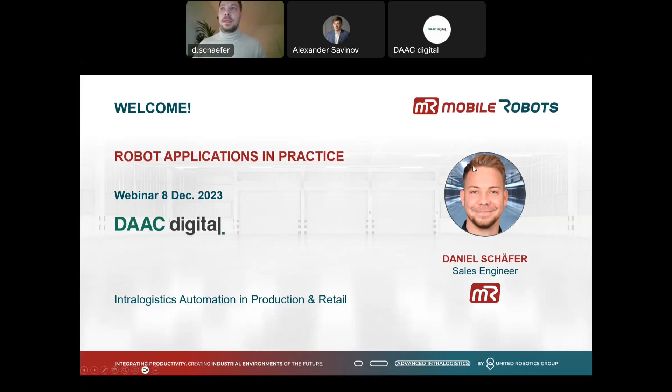So the opening is already done. Thank you, Alexander, for this. In the second part, I will show you some of our automation solutions from our company, Mobile Robots. This will last about, not 30 minutes, I think about 45 minutes.

And after that, we will see some performance cases and practical applications that we have already done. I think that should be the most interesting part for you, because there you can see how we really work and how we can make your business efficient with our robot solutions.

After that, we have enough time for a Q&A session. So every question that you have in mind, please write it down and we can discuss about it later in detail. Also, you will get the presentation afterwards from Alexander, and you will have all the presentation and also my contact details.

So the first question is, what is Mobile Robots? Mobile Robots is part of the United Robotics Group, which is a company of companies for robotics and also for automation. In our company, we have very different entities that have responsibility for different robot applications.

We have some companies that have the focus on humanoid robotics. We have some companies that have their focus on service robotics or industrial robotics in general. And we, from Mobile Robots, are part of it, and we have our focus on collaborative robotics and autonomous intralogistics with mobile robots. Over these company groups, there is the RAG Foundation.

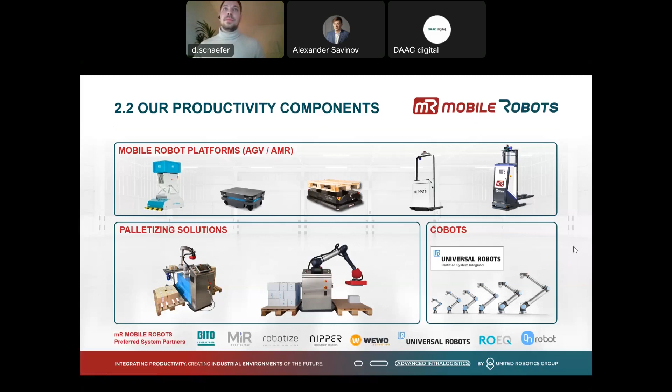So we are a total solution provider. What does this mean? Or why should you use an integrator instead of a manufacturer? When you are searching on the internet for robotics, or collaborative robotics, or autonomous intralogistics, you will find all these manufacturers, or even more.

So, for example, if you have a use case and you are looking for a solution and you contact the manufacturer, the problem is every manufacturer will tell you, okay, I have the best product in the world. But it isn't that easy. There are some really good products, but not every product is usable for every use case. And that is where we come into the game. We are an integrator and total solution provider.

So the first step is that we do a consulting. We look at the use case and see what is the status quo and what do we need to make a total solution and automate the intralogistics so that it works really well for the customer. The good thing is that we are independent from the manufacturers. That means for us, it doesn't matter what system we use, it only matters that the use case works for the customer. So in the first step, we do the consulting and show different systems that could work.

Then we build a total solution with a conceptual design and check the feasibility. Once we've developed this with the customer, we do a test installation. That could be one week, but it could also be several months, to see how the solution really works in the customer's environment and how the employees react to it.

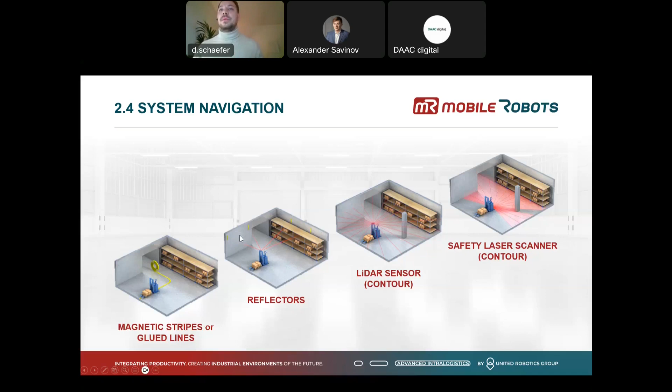As I told you before, there are two big differences in mobile robots. The first are the AGVs - in English called automated guided vehicles. And the other ones are the AMRs, called autonomous mobile robots. I will show you now what the differences are.

So an AGV, as the name suggests, is a guided vehicle. That means it is guided by lines. In the past, these were glued lines or magnetic lines on the floor. Nowadays, these lines are virtual. We have a start and a goal, and we follow this line till we reach our goal.

But what happens when there's an obstacle, for example a pallet or a person? The system detects the obstacle with its sensors and will stop, staying stopped until the obstacle is out of the way.

The advantage is high availability and very predictable, reproducible cycle times, because we know every time how the system will go, and employees also know this is the path for the systems. The disadvantage is that we need free travel paths, so in an environment with many obstacles, this might not be the right solution.

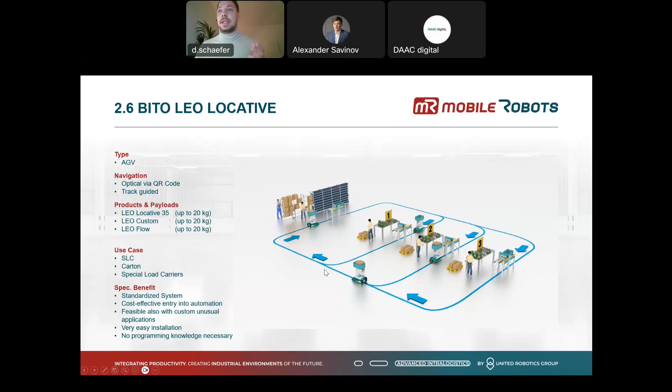The second one is an AMR, an autonomous mobile robot, as I told you before. MIR is the manufacturer's name. Maybe some of you recognize it, because they were the first manufacturer that developed the modern mobile robots as we know them now.

This is a platform AMR. It has a payload up to 250 kilograms, and we have many functions on this because it's a platform, and you can build more or less whatever you want above it. That means this robot is like a chameleon; we can use it for many different use cases. I will show you the video.

I hope you hear. Okay, there's no sound behind it, no problem.

This is one use case, for example: one tool we call a shelf carrier. You can put a shelf on it and transport it. It doesn't require very much space.

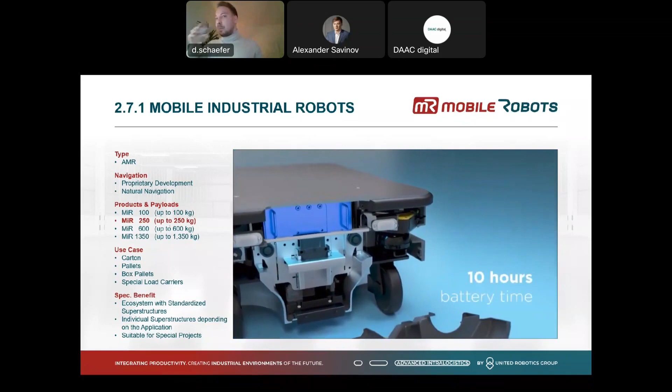We see what the robot looks like from the inside. This is the safety field, here are the laser scanners, and here is a 3D camera for safety as well.

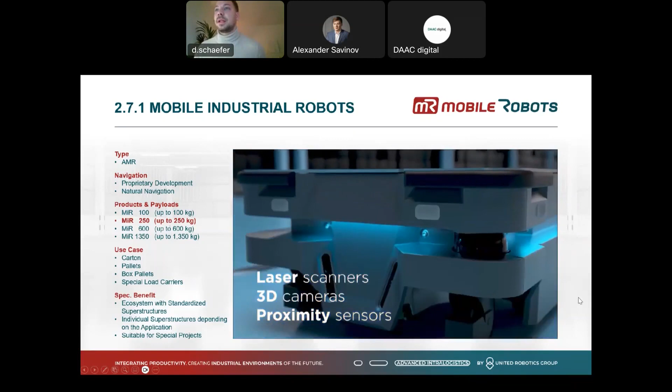They also have light indication when it turns, for example. You can put a cobot on top, or whatever you want on top. This is a really big advantage.

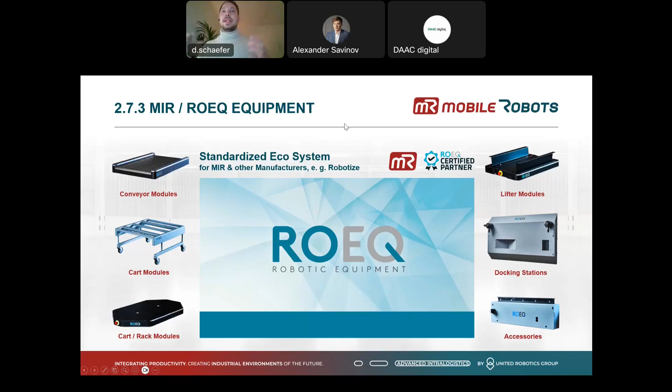For this robot, there is an ecosystem of equipment. We build some equipment ourselves; when we need a special solution, we do it completely on our own. But there is one manufacturer called ROEQ, also from Denmark like MIR, and they have built a standardized ecosystem with many functions.

The most important are the conveyor modules, for example when you want to transport goods from one conveyor to another, or the cart modules, as we've seen before in the video, on which you can build whatever you want—it could be a shelf or any other structure. There are also some lifting modules and other accessories.

And I will show you some of it now.

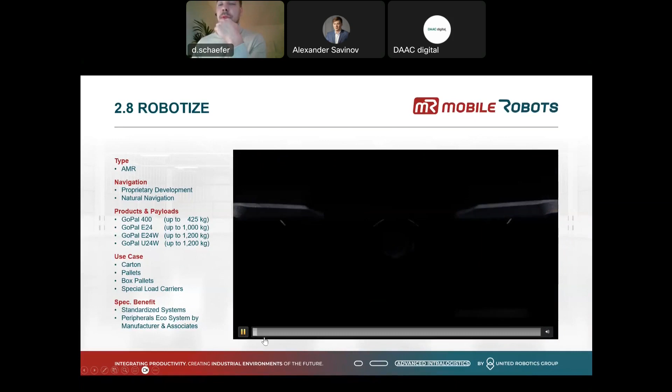What is also very cool on this robot: on the one hand we have the safety laser scanners for human safety, but on the other hand, what you see here is a safety bumper for the foot. So we have two different safety features, which is very good for the safety field. Every robot, when it drives, has a virtual safety field around it, and because we have this safety function, it could be very small. This is very good when we don't have much space, because it reduces the footprint in the sensor field of the system.

You can see here, it's very flexible. It can turn about its own axis.

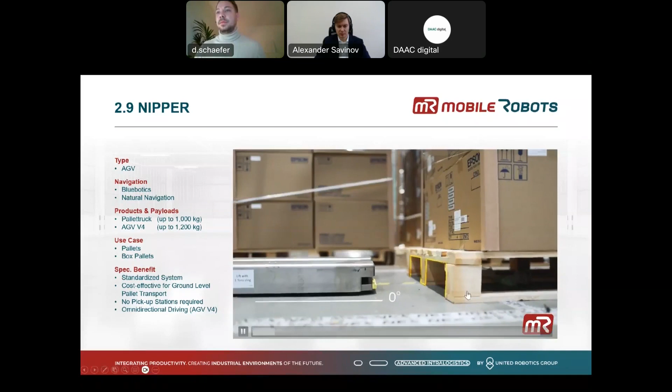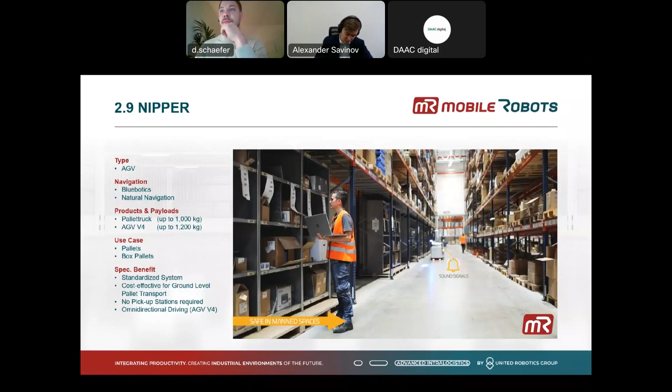We have here forklift scanners and even barcode scanners here. As you can see, we don't need much space around the vehicle. The old one has a speed of 1 meter per second, but the new one can also drive 1.5 meters per second. Here are the safety laser scanners between the forks, and we have a blue spot as well.

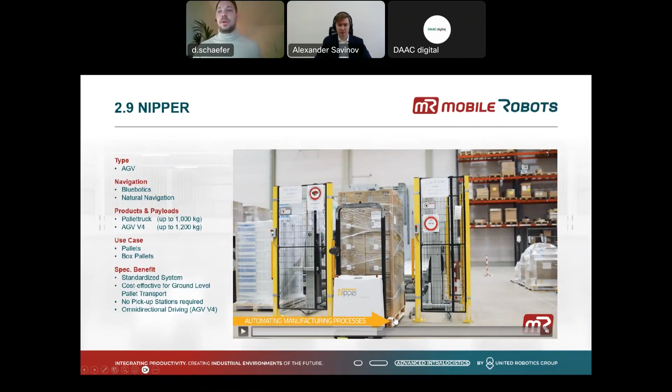On this system, we have only a small lift, about 150 millimeters. That means it's only for floor-to-floor transport, or for example you can transport it to a conveyor that is near the ground.

Yeah, pleasure. So this was on this year's Logimat. Here you see myself with the sales manager of Nipper, Willem Lepelas, and behind him you see the new Nipper version 4. It has a very cool new design and also now a LiDAR sensor on top for very stable navigation, as I told you, because you can see on the bottom floor and at this height as well. But you will see later on this video the driving functionalities, which are pretty cool and a very big advantage.

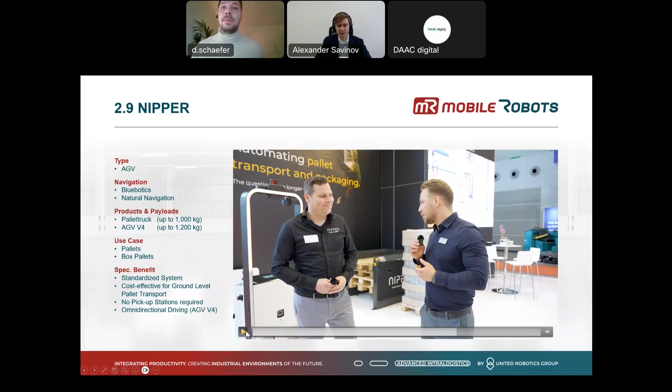To see the new Nipper running on your booth, what was the motivation behind this new development?

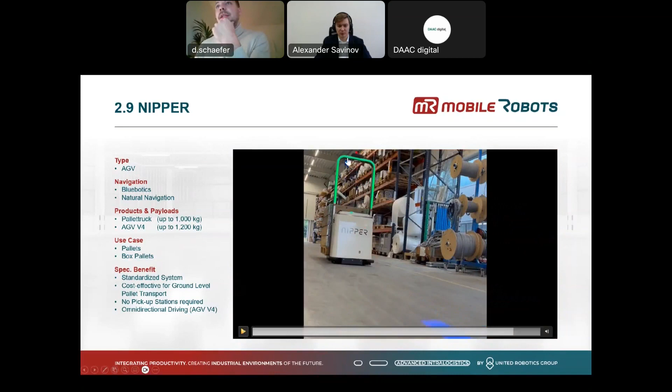Well, thanks for having me. The motivation is to have the perfect connection in a production environment. So what we redeveloped is an AGV that can fit into any existing production process. It has omnidirectional driving, wireless charging, and the lowest forks on the market. You also see here LED lights that can react to the environment. That means it is an AGV, so it will stop when an obstacle is in the way, and with these lights it signals to the workers or employees what status it is in.

When it is green, it means the way is clear and I can drive. For example, when a person walks here, this light follows the person and detects them. It would turn red and stop, telling the person they are too near and the system can't drive anymore. When the person goes away, the light changes and it can drive again. This is very good for acceptance among employees because they know what the system wants, more or less, with any type of pallet.

So maybe you ask yourself, what if I have pallets but don't want them transported only from ground to ground, and instead need to pick them up from a shelf? For this use case, we have the WEWO AGV pallet mover.

It is one of our favorite systems as well. As you can see here, we have safety laser scanners between the forks, and on top we have a LiDAR sensor, plus a light and blue spot. So we have a really good safety field and really stable navigation.

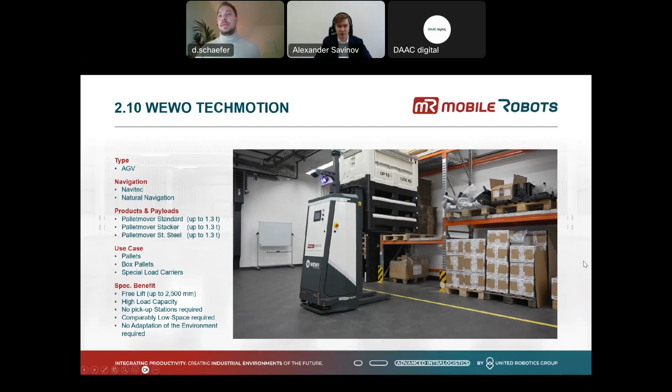But it requires a little bit more space because it is bigger, for example like the Nipper. Here you see the first shots of our customer Mon Media, where we implemented 12 of these systems.

So the lift is also able to bring goods to a conveyor that is at a very good height, as you can see here.

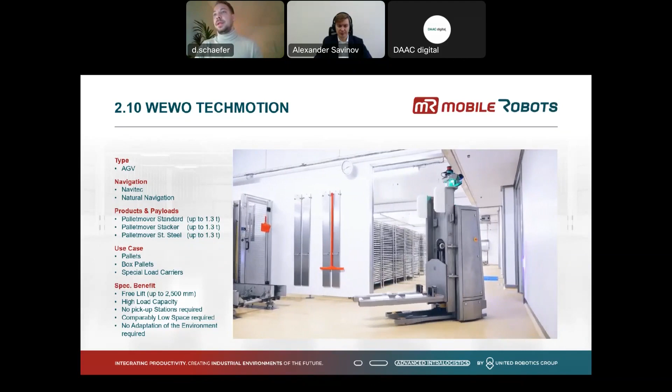So here's the stainless steel version for the food industry or pharma industry. And we can do a special design if it's needed for the customer.

As we are not only a system provider, we are an integrator. That means we are always looking for good solutions for the customer, especially for software, because every system has its own software. We wanted to create a human robot interface, so we developed our own software for a big customer, and we now use it on other projects as well. We call it Mission Control.

With this software, you have full insight into every mission, and we have a dashboard. You can use it with different users, and you can use this software not only for one system but for several other systems. That means when you have different systems in your company and environment, you can control everything with this software.

It's very easy to use for the worker and the employees, and you can create new missions within seconds. You can chat between persons and devices. You see the loading capacity of the system here as well every time, and you can track where the system is.

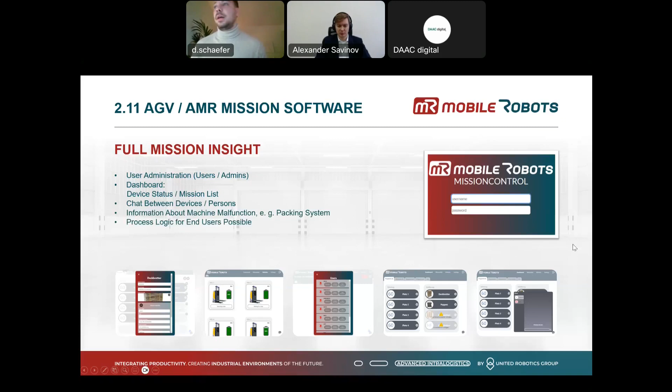This is something we are working really hard on. Okay, this was more or less most of our mobile robots. As I told you, that is our standard portfolio, but we have several other projects where we use other robots as well. As we told you, we are independent from the manufacturers, meaning if we have a use case that requires other robots, we will use other robots to make a perfect solution for the customer.

Now we come to our second big business case, and that is cobot palletizing. Palletizing was one of the first use cases that we had with collaborative robotics, and over the years we developed a very good standard solution for different palletizing needs.

We have different sizes. This is the medium one with a UR10E from Universal Robots. It can have a payload of up to 12.5 kilograms, and we can palletize Euro pallets with it. Then we have the model Palletizing L with either a Doosan cobot or the Universal Robots UR20, with a payload of up to 20 kilograms.

We are also able to palletize bigger pallets like industrial pallets as well. And now there's the newest development from Universal Robots, the UR30, and now we are able to palletize payloads of up to 30 kilograms.

And what makes this solution so special? I think most of you know normal industrial robotics, for example from the automotive industry, which are always really big and need really closed safety fields, with big fences or sensors around them to make it safe. This solution is not only flexible because you can change the location within minutes, and it's mobile, but it is also safe in itself.

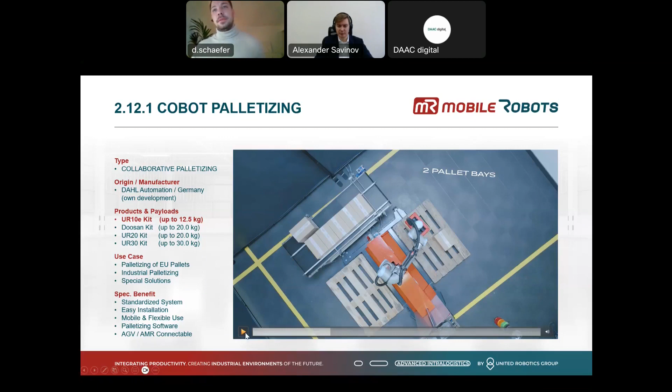We have the system there as well, so we can palletize to a height of 2.2 meters or even more.

We cannot really hear you when it's on top of the video. Please, we cannot really hear you when you speak on top of the video. Okay, okay, thanks for the information.

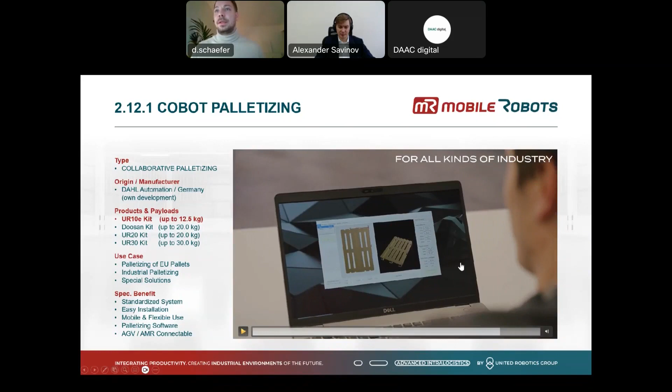Here we'll see the own palletizing software that we developed. It comes with every palletizer, but we will go into detail about this later on.

So this was the medium kit, and now we have also a video for the bigger cobot, the 20 kilogram one. Here we have a Doosan cobot on top, but we usually use Universal Robots. This is a special conveyor that we built. It's very special because it has rolls on the surface. For this solution, we need to grip two packages at once, and we have special grippers already built that can pick up six or eight boxes.

When the products come from the conveyor, we need to stop them here. For example, if you don't have a carton but a surface that could be a foil, and we stop it while the conveyor keeps turning, you could damage the surface. For this reason, we have little rolls here, so there is no pressure at all on the product, and we can stop it without causing any damage.

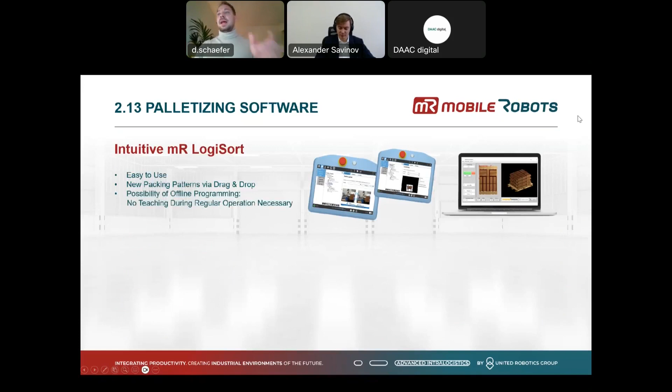Now we come to the palletizing software that we developed. We call it LogiSort, and it's really easy to use. It always comes with our system, and you can create new patterns within minutes. For example, we have customers who have several hundred different patterns, or they can have new patterns within days. With the software, it's really easy with drag and drop, so they can create these patterns within minutes.

First, you create the boxes and their dimensions, then you set the orientation, and then you have a new pattern. You can use this data with a USB stick, put it on the palletizer, and then use this pattern very fast. This is our own development.

Okay, this was more or less the presentation of our portfolio, and now we will move on to our performance cases.

Two of them are filmed by ourselves. The biggest one, or the most important one, is the proof of performance on Claas Industrietechnik. It's a very big customer of ours, and in this use case you will see how we really start every project and what is possible with the time. It is about 13 minutes.

When this video starts, I will stop speaking and let you enjoy it. After that, we will see a use case from the printing industry, the Bertelsmann Verlag, with our WEWO systems that I showed you before. This is only a teaser because the marketing is still in the works; the video will be finished early in 2024. My colleague Manuel is working really hard on it. And then we have also some performance cases from our partner MIR, because they have very good marketing. This is from automotive, mechanical engineering and retail goods, from Eaton and from Forvia, and they are in the Czech Republic and in Romania.

So I hope this works now, one second. Okay, you see the video? Yes. So now I will stop talking, I hope you hear everything. Please enjoy the video. We can hear your comments as well, it's now the perfect volume. Is it too loud? If you have some insights about this, you can add them on top. Okay.

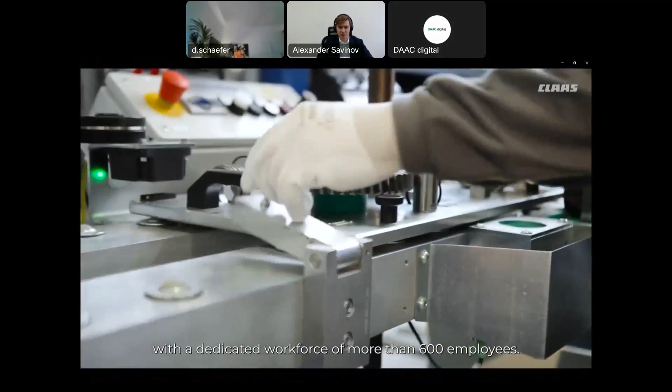Claas Industrietechnik in Paderborn, Germany is a center of technical innovation. An impressive history unfolds in the factory halls, inextricably linked with the renowned parent company, the agricultural machinery manufacturer of the same name. Since 1957, Claas Industrietechnik has been driving development in drive technology and hydraulics, with a dedicated workforce of more than 600 employees, for Claas machines as well as external customers.

A particularly innovative product line are the continuously variable transmission variants for Claas tractors. The components required for this are processed with maximum precision in 16 fully automated processing stations. Employees, trained to automotive industry standards, assemble around 700 components into one drive unit. To provide them with the best possible support, the company has always relied on appropriate technological solutions in production.

With the goal of increasing the efficiency of internal transports, more than 90 kilometers per day, Claas Industrietechnik has been trusting the AMR and AGV integrator DAAC digital and the autonomous transport system GoPal from the Danish manufacturer Robotize since 2020. We started in 2020 with Claas and first made a test position there: one robot, one charging station, four pallet stations. With these components, we first mapped a basic process to find out whether the unit can work in this environment.

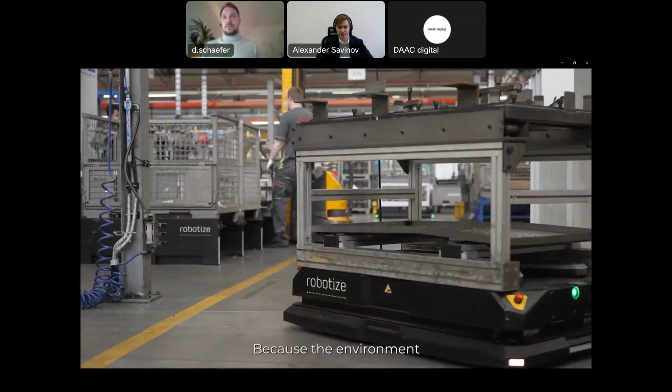Because the environment was quite demanding, attributable to oil from the processing machines and metal chips lying on the path, we had difficult ground requirements in the sense of very uneven ground. This resulted in many blows that the device had to cope with. We were faced with narrow driveways and a lot of passenger and device traffic.

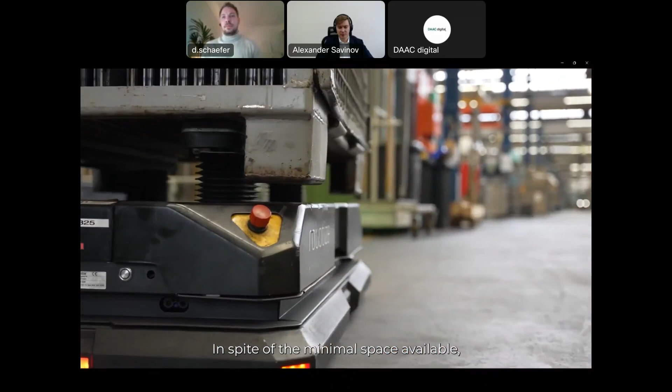After 2 months of testing, we were able to determine that the robotized system can cope with these difficult requirements. In spite of the minimal space available, the robot works at its lowest limit.

We have really created a lot of storage space here and a very fluid workflow for the employees. The robot we tested with was then replaced by the final model that Claas intended to use, a robotized GoPal E24. This type is able to handle payloads of up to 1 ton. With this first step, the initial process was finally implemented.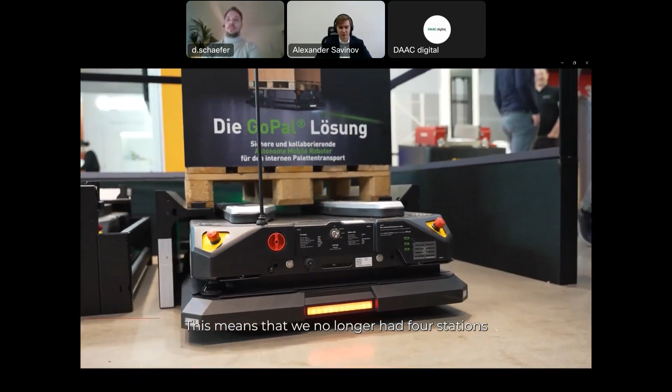This means that we no longer had 4 stations with which we only tested, but we actually equipped several processing centers and set up several stations in front of the washing plant in order to carry out this process of delivery and return of the goods carriers to be completely automated.

As of today, processes have been introduced to transport goods away, which previously had stood in the production area waiting for the next machining step. These parts are now transported to the high bay warehouse by the robots and recollected from there when needed again.

This makes the manufacturing area much tidier. You have more space and you can work more cleanly. For Claas, advantages of the robotized system are actually many-fold, depending on the process we focus on.

It has been shown that the system is very well suited to automating a process that previously had been very strenuous for workers. As a result, heavy parts are no longer carried manually from the machining centers to the washing plant, and the goods carriers back again. We completely automated this by the robotized system, resulting in corresponding capacities being freed up among the staff.

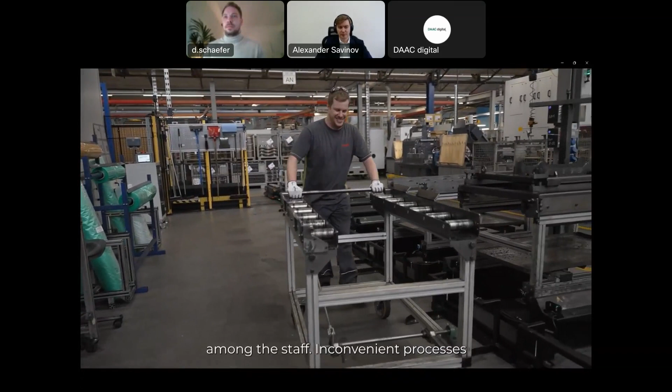Inconvenient processes, where men only walked through the production, have been eliminated and could be completely taken over by the robotized units. Regarding the selection of the autonomous system, the choice has fallen on Robotize, since it is very flexible.

In this environment, an AGV, for example, would not have been successful, since Claas is a company that has grown, a production environment that has grown. This means you have no wide corridors that are always free, that always look the same. This is why a flexible system is needed that can avoid obstacles and drive around them, a system which can also choose alternative routes when a track is completely blocked.

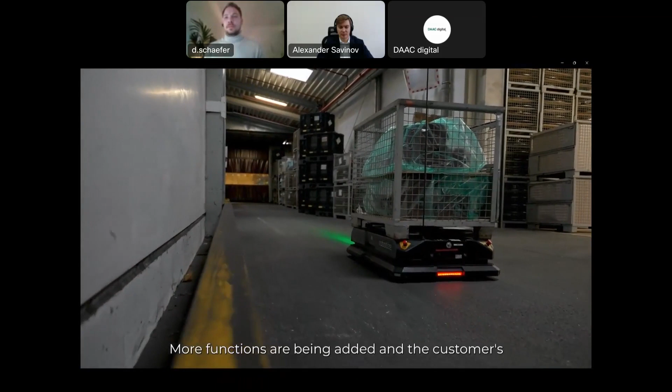Another advantage of the robotized system is the software updates. In this case, we have a very flexible manufacturer who accepts our suggestions for improvement and who delivers software updates which are at our free disposal. More functions are being added, and the customer's requirements were and still are specifically addressed.

Different features were introduced especially for this customer, but they also bring added value across the entire fleet. This means such developments are not only customer-specific, but also bring added value again for each user of the system. As we told, Claas has started with one device, and then we went one step at a time here together with the customer.

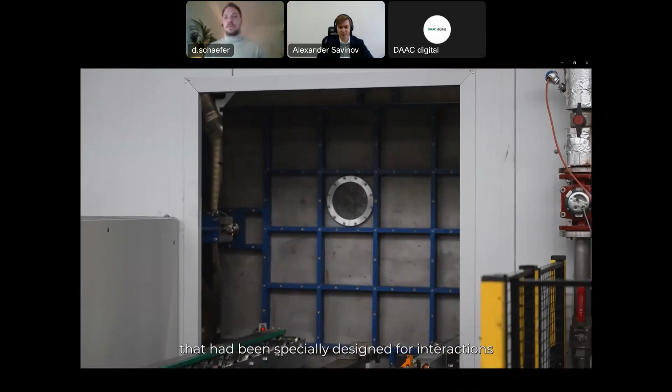In this process, the system was not only expanded with robotized components, but additional modules were also combined with it. This means not only were more and more machining centers integrated, but a washing system was also installed that had been specially designed for interactions with the robotized system.

As a result, the robots can now enter this washing plant automatically. The parts are removed from the carrier and fed automatically into this plant. The robot takes the goods carrier out again and puts it down so that after the cycle, a worker can put up the empty carriers.

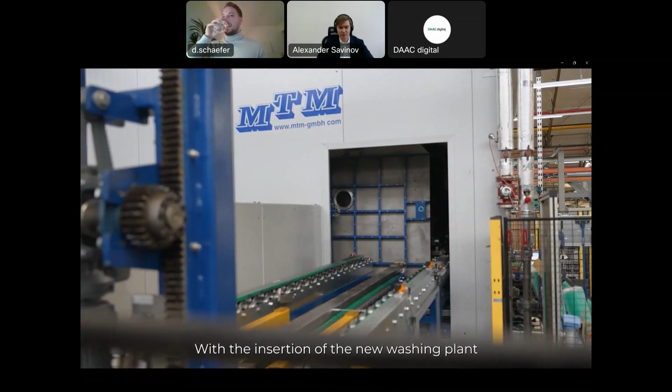And then these goods carriers are returned to the machining center. With the insertion of the new washing plant, a completely new warehouse concept was also directly integrated. We are talking about this large area of stations you see here.

The process is that the washed parts are taken out of the plant with a crane and, as it is shown here, are put into the mesh boxes. Once the boxes are full, they are moved to the warehouse.

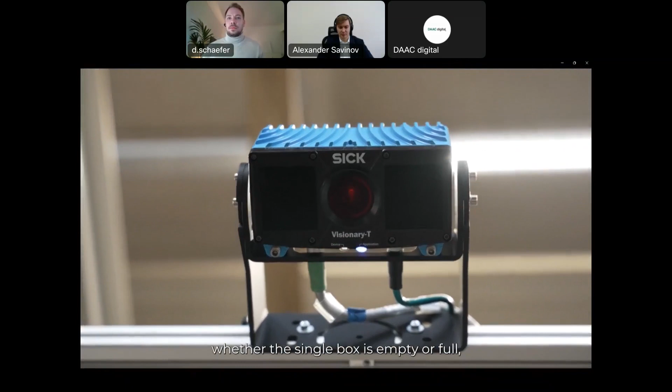These mesh boxes, that's the key here. They always have to be positioned the right way around. Therefore, they are analyzed by a camera to verify whether the single box is empty or full, and if its alignment is correct. Depending on its status, the mesh boxes are then correctly sorted by the robotized system and reintroduced into the process cycle again.

We have seen that the employees were always positive about the replacement of the manual processes. It's nice to see all the interactions, not just between employees and AMRs, which is kept very simple indeed. We use manual call buttons. The operator just pushes the button, and then everything is done for him.

At the same time, he also has a status display. This is partly solved by digital means, by the use of tablets or screens, as we can shift this status functionality with more complexity to the devices mentioned.

In addition, we ensure the interaction of the AMR system with everything that is important in the manufacturing environment. The simplest example is the roller doors. The AMRs pass through a large number of roller shutters at Claas, some sensor controlled, some actively opened by the unit. Here we benefit from having simple I/O boxes on board - very simple small boxes which are fully integrated into the system. You can directly connect the roller gates, configure them, and they are included in the system.

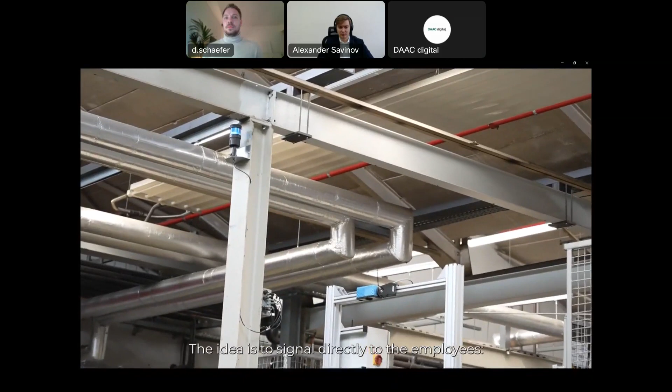For example, in the storage area, we control LEDs via these I/O boxes. The idea is to signal directly to the employees that there are pallets here that now have to be picked up and taken to the high bay warehouse. This means visual indications to trigger interactions with staff can be easily implemented.

A very important aspect is also the topic of security, especially on the main corridor, where our robots are traveling up to 2 meters per second. Through a system that integrates not only our AMRs, but also the traveling forklifts, we project visual markings directly onto the intersection ground. No matter if a robot is coming now or a forklift approaches, people are warned visually.

Another autonomous transport that has been implemented with our support is metal swarf removal. In this case, two robotized units are working in combination to remove full chip containers from the machining centers and reposition an empty container.

A special requirement, namely that everything has to fit into the smallest space, which is typical for the brownfield where we can't reschedule, is particularly evident at the parts washing plant. Although this plant was newly installed, it still had to fit into the tightest of spaces.

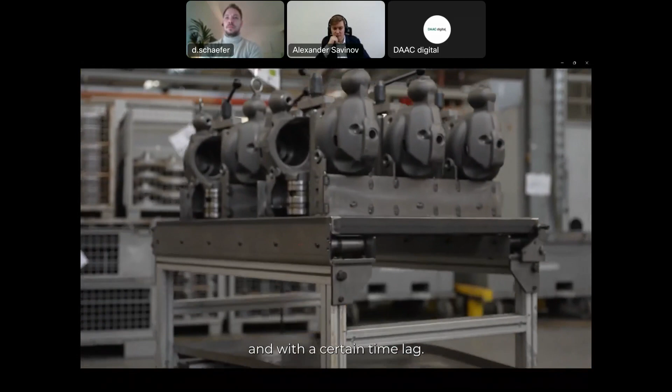About 70% of all transports at Claas Industrietechnik are led to this new washing plant, meaning we have a real challenge here regarding traffic. This is because the transports usually arrive in an orderly manner and with a certain time lag. But especially after the break, 3 or 4 robots regularly gather in front of the washing plant. This had to be solved.

Indeed, we have an AMR system here that finds its own way, but even this feature is ultimately limited. Consequently, as the responsible integrator, we had to work very precisely and take many details into account in order to finally achieve a good workflow here and ensure fine processing of all individual missions. And this is exactly what we have managed to do.

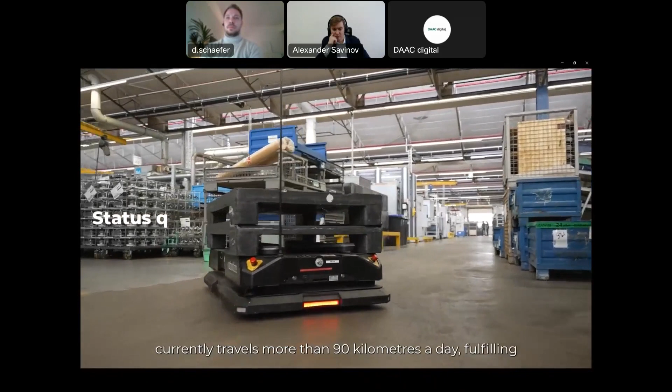As of today, the total system has grown to 6 robots. We have approximately 150 stations, and we are currently working on an expansion, for example with a pallet magazine that is to be integrated. The robot fleet currently travels more than 90 kilometers a day, fulfilling about 500 single missions. That means we are proud of a really productive and effective system here.

So that is an impressive case. Congrats on that, it is an impressive case, yes. Yeah, we are glad to hear this. Yeah, we are really proud of it.

So the second one, this is also a very impressive case, or maybe an even more impressive case, but it is not fully finished. We only have a teaser here, but it will be finished in early 2024. And if some of you are interested, we can give it to you as it is finished. We now see the teaser here.

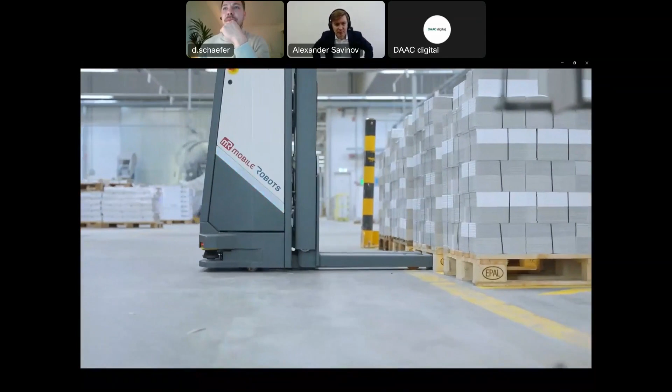What you can see here, this is an AGV. That means, as I explained before, we only follow the line. But that doesn't mean that this should be a problem. When the driveway is clear, we are able to drive the same ways as humans with other forklifts or other systems. So it has a very good machine-human connection, and it is very stable in the navigation, even if there are other vehicles on the roads and other traffic.

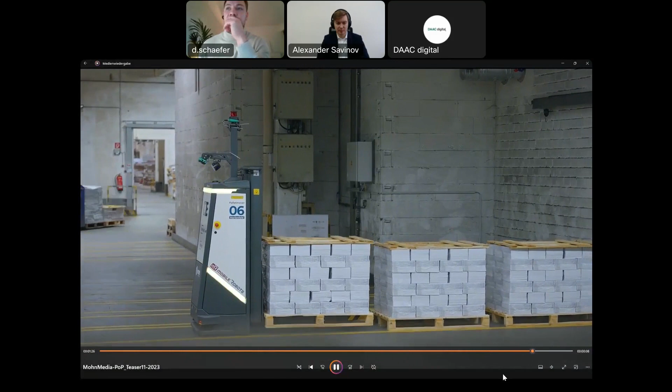I will be happy when this use case is finished and this performance case is finished, and I will show you the full video then. So now we come to the performance cases of our partner MiR.

These are the performance cases of our partner MiR. It is not filmed by ourselves, but we have already done many projects with these robots and many use cases. It should be interesting because it is in Eastern Europe too. This is Forvia, based in Czech Republic, and Eaton, based in Romania as well. Now we see the performance cases of our partner MiR.

Forvia is one of the world's largest automotive technology groups, and 1 in 2 vehicles worldwide is equipped with Forvia products. In our Forvia exhaust system plant in Písek, we produce exhaust systems for our main customers: Daimler, PSA, and Volvo.

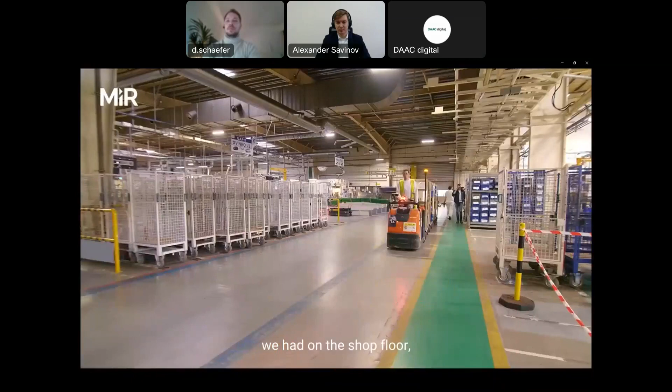I would start from a historical point of view. Something like 5-6 years ago, we had on the shop floor forklifts, stackers, and manual guided equipment with people. Of course, we faced a lot of risk of accidents, and we decided to switch to automation.

We chose MiR robots and installed 14 robots, which secure both safety and efficiency on the shop floor. The mobile robots MiR are also used in other countries - aside from the Czech Republic, we have them in France, Italy, and Portugal. Forvia uses its fleet of MiR robots to automate several processes within production and logistics.

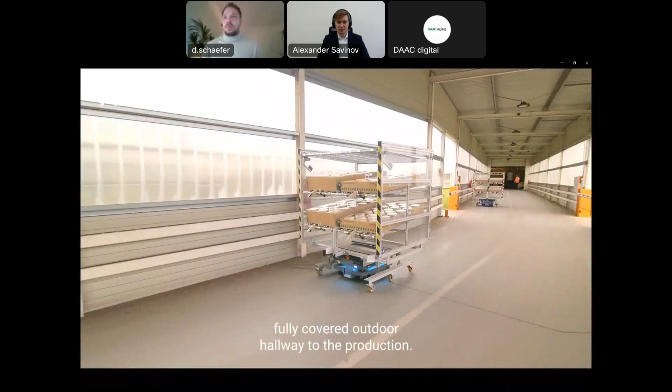The 7 MiR 250 robots are used to automate the transportation of monoliths from the monocage to the assembly of work-in-progress parts. The robots transport the monoliths from one building through a long, fully covered outdoor hallway to the production area. Here, gravity systems deliver the monoliths and pick up empty packaging to take back to the warehouse area.

Forvia uses 7 MiR heavy-duty robots to automate the transportation of finished goods from production to be picked up in the logistics area. The robots are automatically summoned when a pallet is ready to be picked up via a sensor system, and it connects with the custom automated racks that load the robots. When the robot has delivered a full pallet, it picks up an empty pallet and brings it back to production for a fully automated workflow.

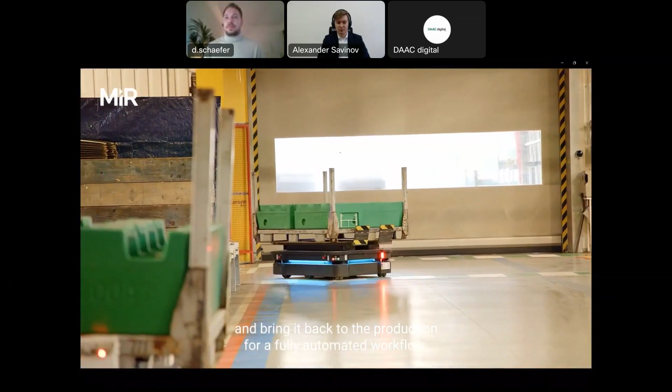We also have a connection point between the assembly line and the strapping machine, which is another step of digitalization in this plant, decreasing the work content of our workers. Every day we get stronger with the technology, and I remember when I arrived 2 years ago, it was really a mystery for me. Now it's totally easy - I know how they work, I know how to resolve problems, etc.

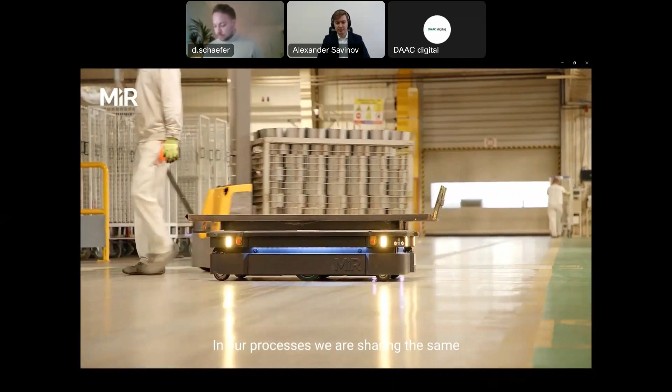In our processes, we share the same area with other equipment and with people serving the lines, and MiR robots fit best the environment we have on our shop floor inside FCM Forvia. I think people and robots can align together, as the robots are smart enough to recognize people on the shop floor, so there's no problem to stop or bypass people who are going around.

MiR fleet is used for organization of missions, and next to this fleet from MiR robots, we also use our internal script, which helps organize the flow on the lines and between the lines. Our next goal is to integrate the MiR fleet into the Forvia ERP system.

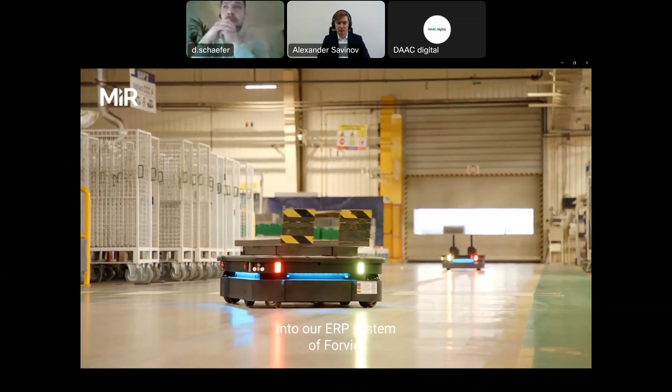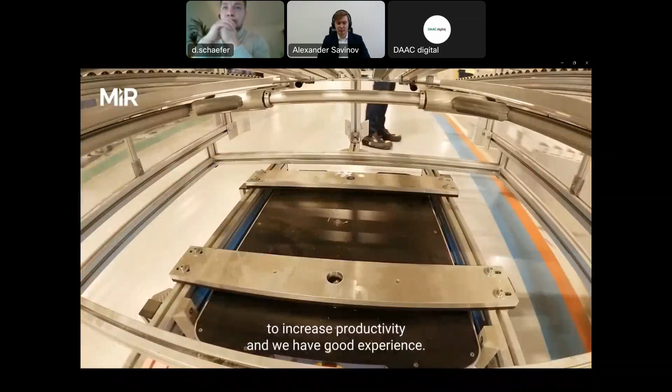Mobile robots MiR are working in our plant 24/7, covering 3 shifts per day. We chose MiR due to the simplicity of the process setup, like Wi-Fi connectivity map running in the fleet. We have quite a reasonable payback of 2 years, giving us the opportunity to validate the investment. MiR robots help us increase productivity, and we have good experience. We got a lot of support for integration across Europe, and there's big potential for wide usage in our operations.

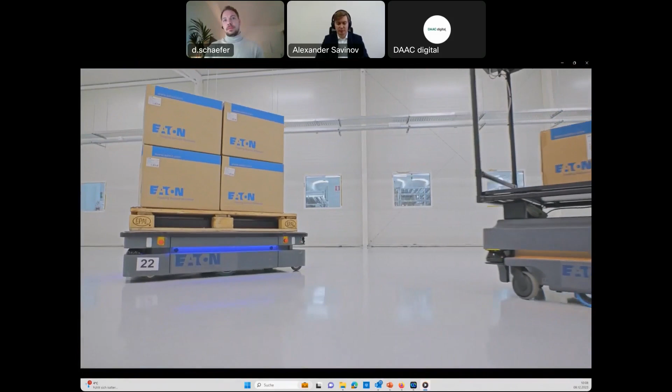Eaton is a global power management company. Our plant is located in Arad, Romania, and manufactures products for our life safety business unit. We implemented MiR robots to optimize intralogistics processes and safety. We wanted to relieve the workforce and shift employees to more value-add tasks, like complex assemblies. MiR robots help us also to optimize processes in view of workforce shortages.

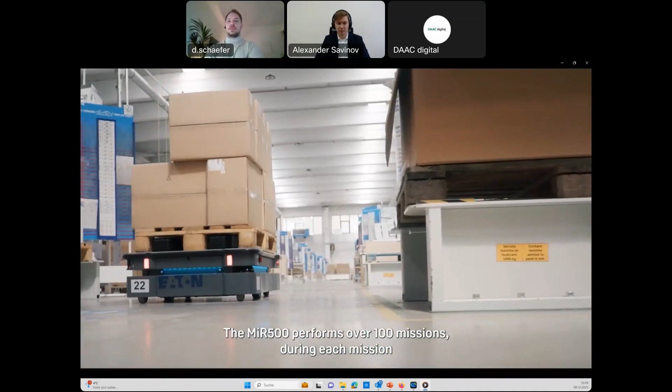MiR robots work 6 days per week, operating in a 2-shift system. They transfer more than 100 pallets every day. The MiR 500 performs over 100 missions, and during each mission, they cover more than 120 meters, marking a total distance of around 12 kilometers per day. The MiR 200 executes more than 120 missions, covering a total of 25 kilometers. This shows the scale of the optimization in our intralogistics processes. Before we implemented AMRs, our employees transported materials using manual forklifts.

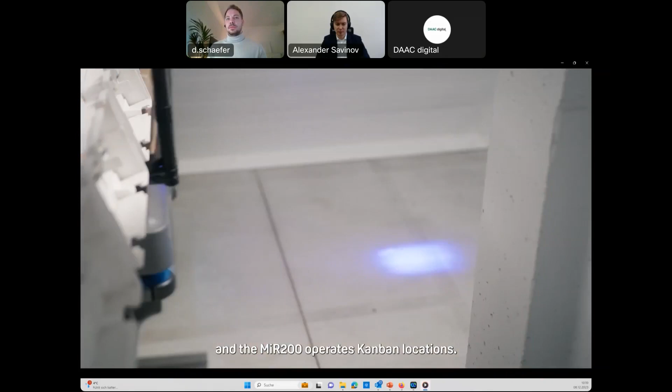This took a lot of time, especially between shifts, when assembly lines had to be prepared for the next production orders. Our fleet contains 5 MIR robots: 2 MIR 500, 2 MIR 200, and 1 MIR 250. The MIR 500 operates 52 assembly lines, and the MiR200 operates Kanban locations.

The MIR 500 robots drive to the rack, lift the pallets, and carry them to the docking station. As for the MIR 200, first, the line feeder gives information about the missing material. The warehouse operator picks the material from the shelf, loads it onto the MIR 200, and selects one of the missions. The robot signals with a sound that it has arrived. The line feeder picks up the load, and the MIR returns to the charging dock.

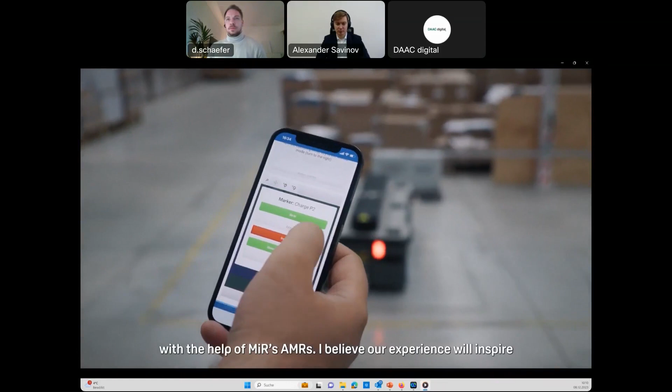We are the first Eaton plant to optimize intralogistic operations with the help of MiR's AMRs. I believe our experience will inspire and encourage other companies, factories that want to improve their performance.

We are expanding our profile and building a new surface mount technology location. The next robots operating in our facility will be MIR 250, one of which we already have. The robots will get to the door, automatically open it, drive up, and pick up electronic components from dedicated racks.

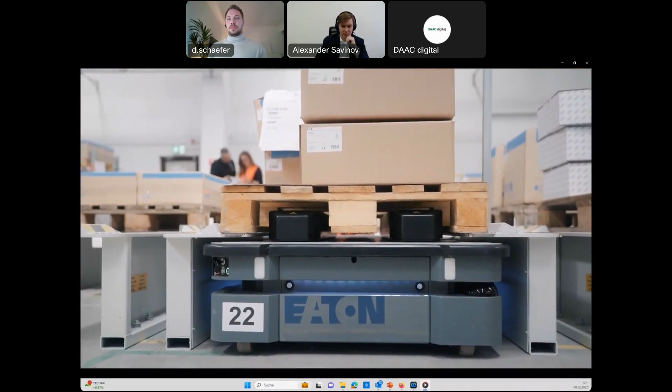Each rack from the docking station has a presence sensor. The role of this sensor is to tell the AMR robot whether the place is empty or not, so that the robot can place the pallet. The AMR, which is at the back, stays and scans the empty position. If one of the positions is filled with a pallet, it will detect it and will not place the pallet there.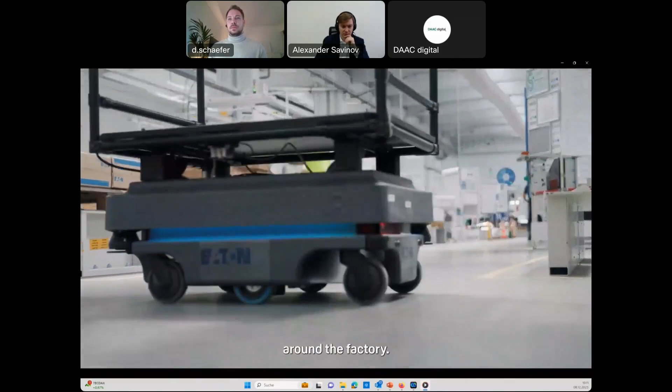Since the implementation of the MIR robots, we have less work related to manual handling and simply moving around the factory. The collaboration with the robots is smooth, and now I spend more time controlling the process and the assembly operations. In addition, I have more time for personal development. And thanks to the MIR robots, the efficiency of our operations has increased, and we've improved the quality of our work.

Okay, this was Eaton from the retail industry, and these were our performance cases. So now we have time for the Q&A session, but maybe I will stop the presentation now because it is finished. And when I stop, then I can see your faces and I can see the chat as well. So that was from my side. Thank you very much for your attention, and I will stop the presentation now.